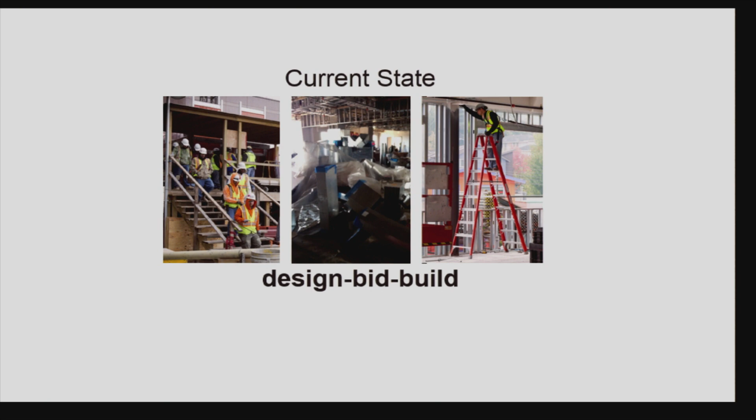So I'm going to go to the current state. This is the current state, you know. And what we have to do is replace the current state with a framework that embraces manufacturing productivity in a fundamentally different way.

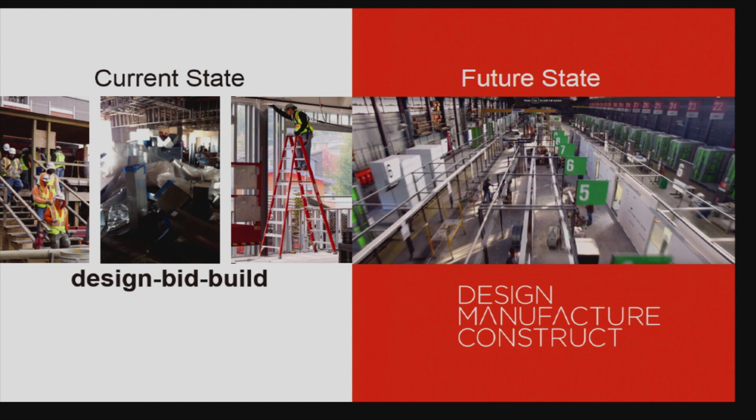So what we'll call it is design, manufacture, construct. Because if there's nothing that I am, it's creative. And if you put manufacture between design and construction, you can take the existing supply chain, like yeast in winemaking—we can take grape juice and turn it into a wholly different chemical reaction, which is design, manufacture, construct.

What we say is we will teach a legion of designers how to leverage manufacturing productivity so that we can make construction simpler. And if we can do that, we should be able to deliver far higher quality at a far faster clip at a far reduced price. And if we can do that, we should be relevant.

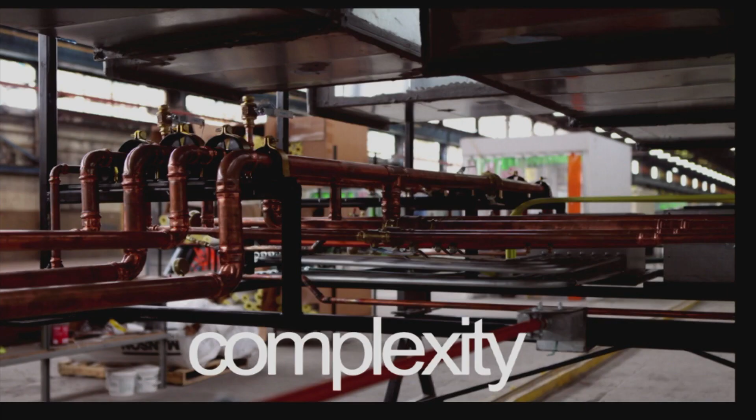So we call it design, manufacture, construct version 1, and it starts with three basic tenets. We are going to find the appropriate complexity. Complexity in this case—these lights are brutal—we're going to find the appropriate complexity.

What this means is we're trying to remove complexity from the job site. But in order to do that, we actually have to increase complexity on the technology side, on the engineering side, on the transportation and logistics side, significantly greater than the complexity we're removing from the job site. But at that place, we can begin to control it in a different way.

The next thing is we're going to do things that allow us, in a dwindling skilled labor market, to create reproducible quality. Many of these things are about bringing in digitally controlled operations, but some of these are taking old school trades and rethinking how they're processed.

The third one is we're going to do this in such a way that there's a payoff. We've heard it no less than three times today: speed to market is a crucial component, whether you are a for-profit or a not-for-profit. The way you are going to get your investment back is that you are going to demand that speed is not a theory, but a reality—not on one project, but on all projects. And if you can do that, you'll begin to move the needle.

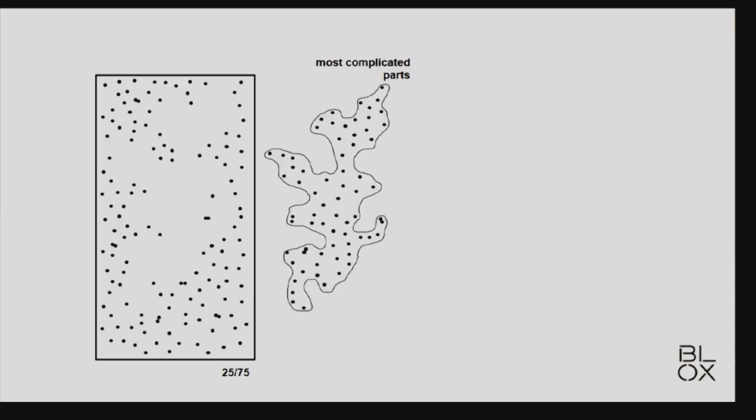On the right, the most complicated parts are going to be organized in a lean factory. They're going to take 800 parts and 13 trades, and they're going to make any number of pieces by the hour. And these are going to be high-quality pieces that can be made in the thousands per year and reinserted with a gravitational changing density that affects the orbits of the trades around it.

Because you can't take a 20 by 20 by 10 foot box and bring it into a job site—and 100 of them—and expect everyone to act the same around it. So it begins to force a change in that behavior.

So this is a case study. We work with a number of clients. HCA has been an unbelievable pioneer with us in this spot. I am careful not to release anything that is proprietary, but these have all been genericized so that we can talk about it. They went on an effort to do design, manufacture, construct version 1 about 5 years ago.

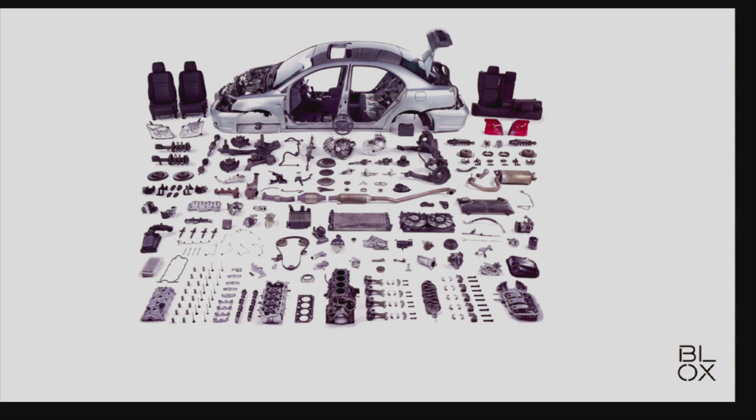So the first thing we did was remove unnecessary variation, and we completely embrace necessary variation. The second thing we do is once that variation is removed, we can standardize parts.

Standardized parts means a little bit different to some people than to others. But what we mean by standardized parts is there's a basic chassis which can be used in a number of different conditions.

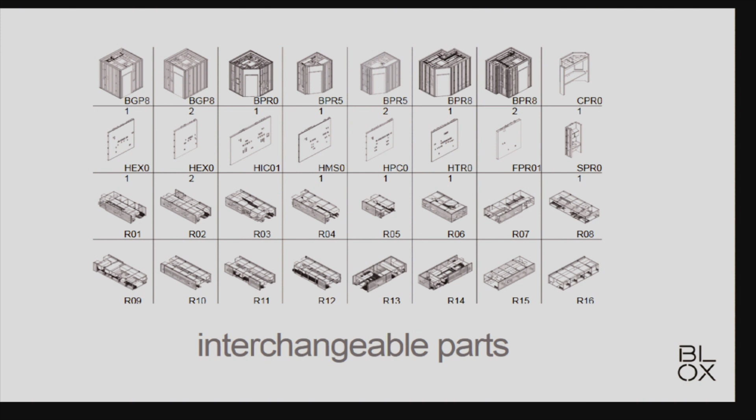And once you have a standardized series of parts, you can create interchangeable parts so that a regulatory approach can go from Texas through IBC and FGI to AHCA in Florida to OSHPD in California. The notion of a universal common denominator makes the parts interchangeable so that if you have a big program, you are not thinking at the project level, but rather the program level.

And these parts exist a priori to the commencement of any project that's going on. There's an expectation culturally that the architects and engineers will begin with these components. But they're not static - they iterate.

The first ones we did were like the old Corolla of my birth year in '65. It had 4 wheels and a combustion engine, and that's it - I don't think it had seats or seat belts. It evolved to having seat belts and perhaps a catalytic converter, and it evolves further to where it's remarkably improved, but still a combustion engine.

All the while, we're working on a set of quantum leap pieces underneath it that move over to become the Tesla - the ones that don't operate with a combustion engine, and don't have a supply chain reliant on petro stations. So this notion that the standards are dynamic is really important.

So what did all that mean? In the beginning we did a half a dozen projects, with an objective of casting a wide net - many architects, many contractors. The second part of it in '15 was, can we scale it? Can we take that to market at a larger place? The third one is where it has now moved virally, and we're working with their team on literally every project - it's assessed on whether it has the pieces or not, and most do.

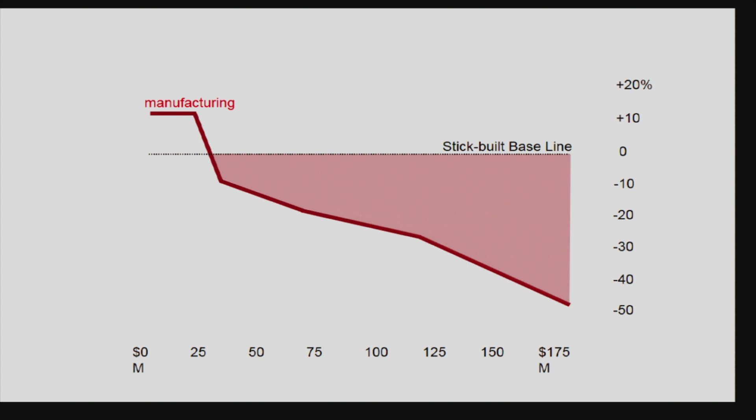And so that was pretty happy, but there was a bad part of the story. Guess what?

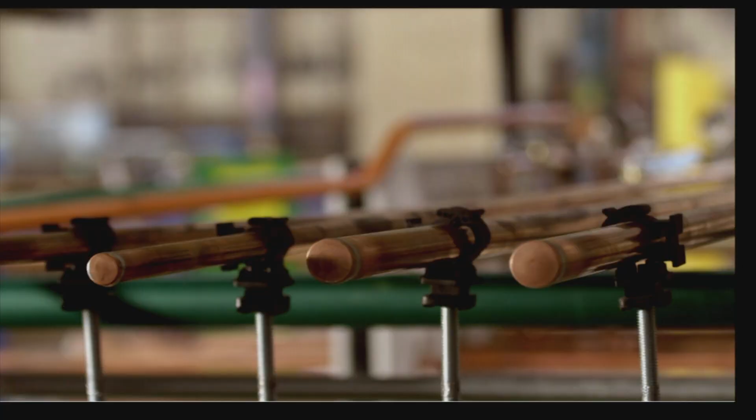The total cost continued to escalate even if the curve flattened a little bit. So we were meeting some significant goals, but not all of them. We wanted to lower overall costs. And this is a 2-minute video, I'll talk over it, of what DMC version 1 looks like at some scale.

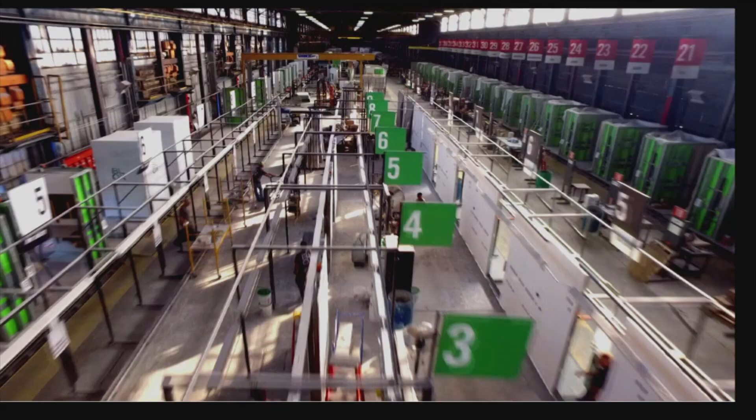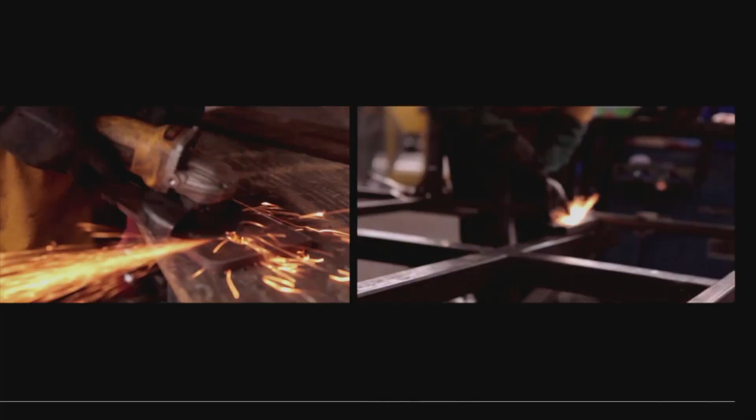This is the old Pullman plant in Birmingham, Alabama. It's sandwiched between Hyundai's North American headquarters, Mercedes, and Honda. We're in an industrial hotbed. We're using a mix of digitally controlled methodologies and manual trade craft that are able to be distilled to a point that we can teach others how to use them.

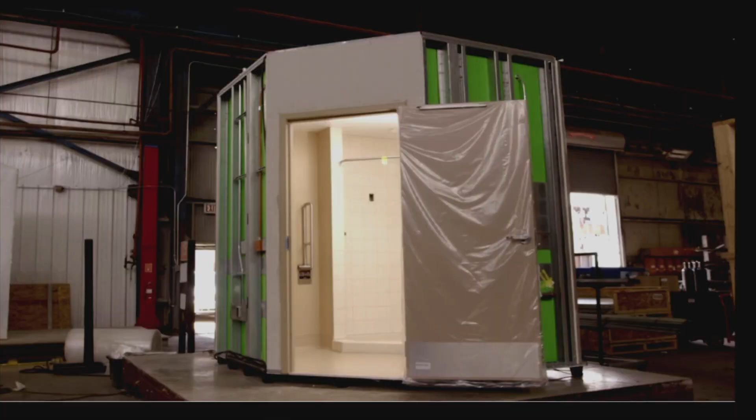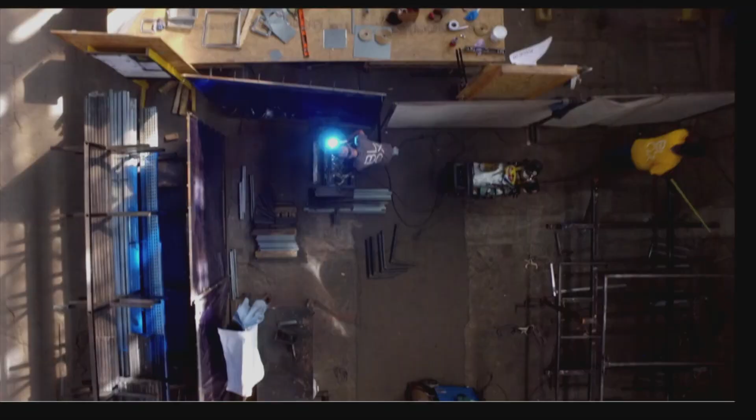We make parts in this spot of fairly low acuity - a head wall, a bathroom, an exam room, various pieces. We have a legion of architects and engineers that work on the other side of a tin wall that are managing this on a daily basis, and then there's a feedback loop between all the ongoing 50 or so projects that are happening with one client to deal with these pieces.

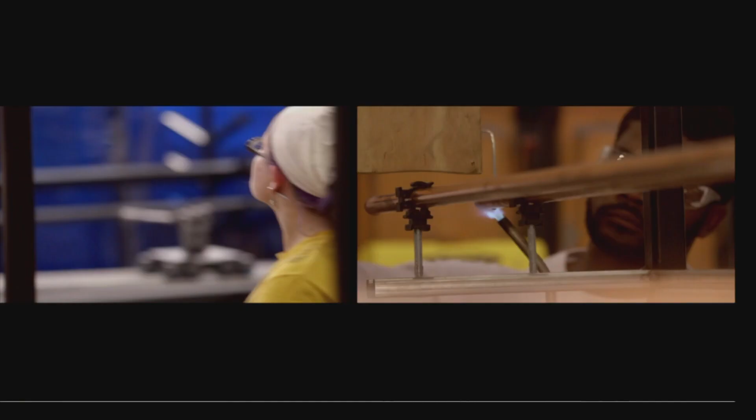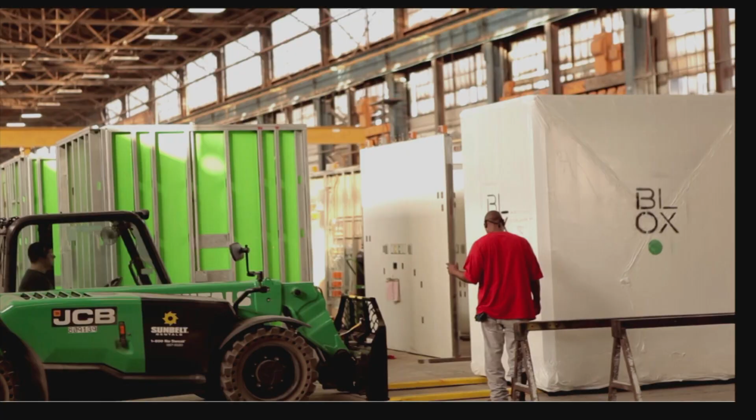Each year we add more complexity. We added MEP racks, and not an MEP rack with a unistrut that is interpreted, but a standardized part that's more like a car frame that can take standard components and be digitally controlled to insert and know that they go together within a really tight margin. We had to develop the methodologies at scale to figure out how to load and pack and ship and get these pieces in there, and it works.

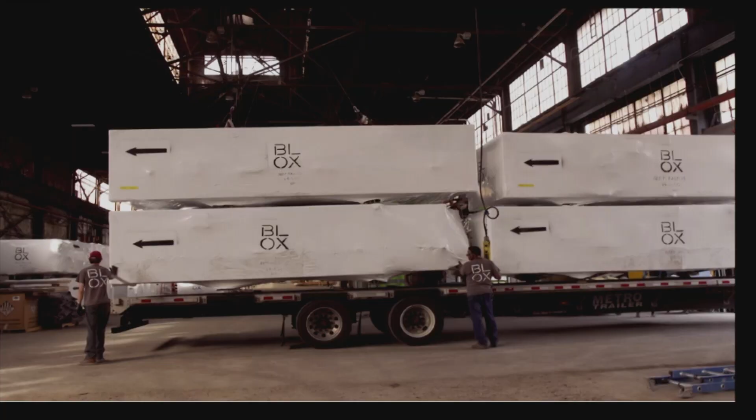These are MEP racks. There are 32 tons of product that's in that. Those 32 tons, we realized that when there was a rounding error, it usually favored the site construction. But when we began to take more and more out of it, and we could quantify every piece that we did, there was a spot where, wait a minute, something's not adding up. Something just doesn't make sense.

And so when we decided to remove all of the pieces, we could really begin to find out what the ultimate cost of those pieces should be. So at the end, you'll see that the surgery and the exam room and all the pieces function as an integrated whole that does not feel in any way compromised by its standardization.

And that is V1, and it is a baby step. This is not innovation. This is what everyone should be doing in the 21st century. It's really incontrovertible. Hard to get there. There's not necessarily a supply chain that's mature enough to be able to deliver it to all of your markets. But in my opinion, it is obvious. It's been proven by others, and it is not easy, but it is worth the effort.

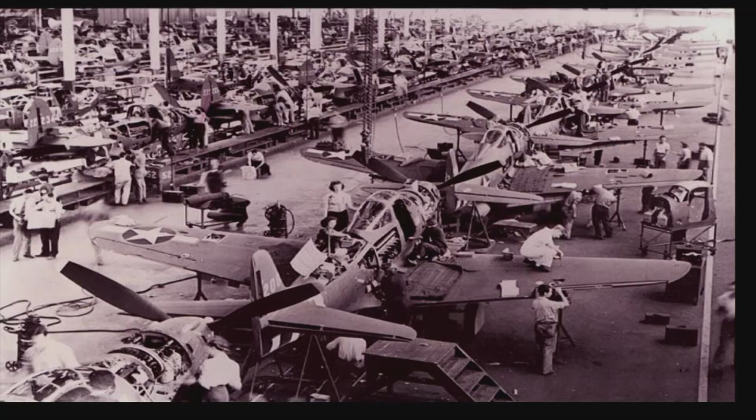But that's not where we want to end on an innovation. We want to talk about where it's going. And where it's going is compared in this photograph to the way they made the P-39 Airacobra in World War II, which is a moving assembly line very similar to the one that we have, and it makes airplanes. And the 747 in Seattle uses the same methodology.

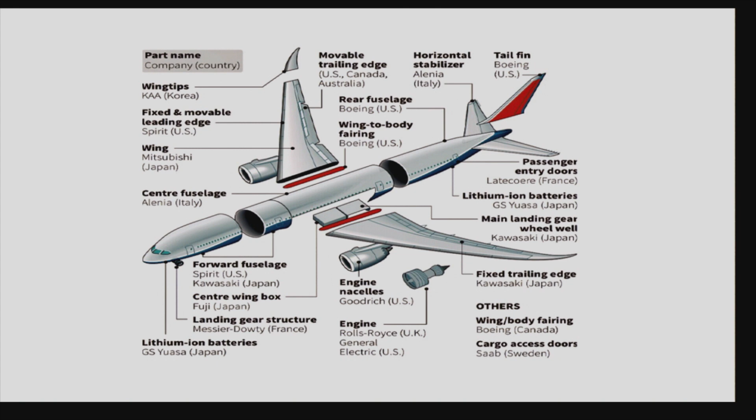But Airbus came on the scene in the 90s and began to shake it up. They brought a little competition to Boeing, and Boeing had to get their act together. And so they left the notion of a 747 into this 787 delivery, which is called chunking, which is taking an airplane, designing it holistically, moving performance components to the best-in-class manufacturers that make the pieces for the tail fin in Italy, or for the engine in England, or for the fuselage in Seattle.

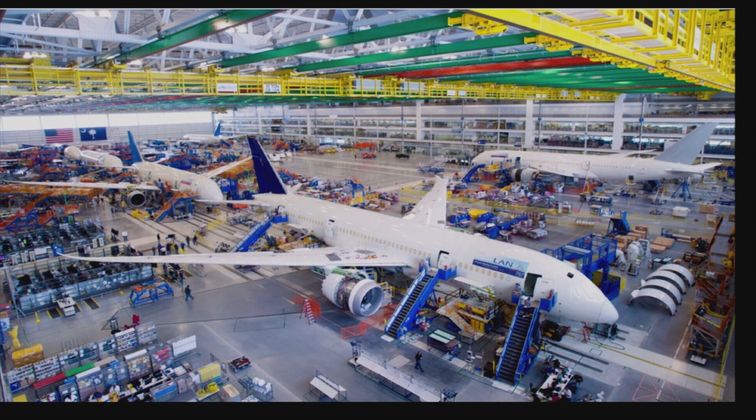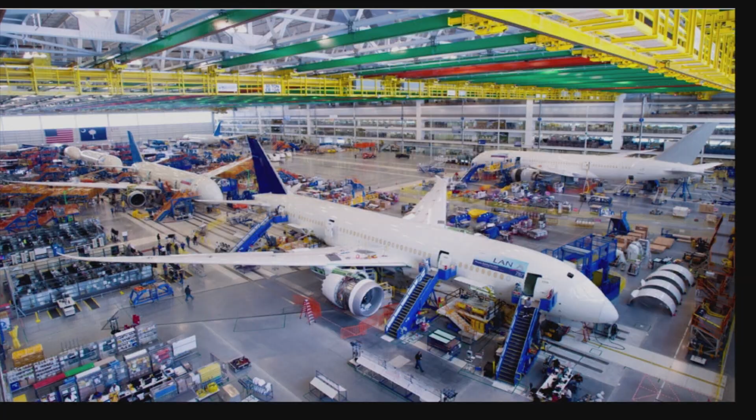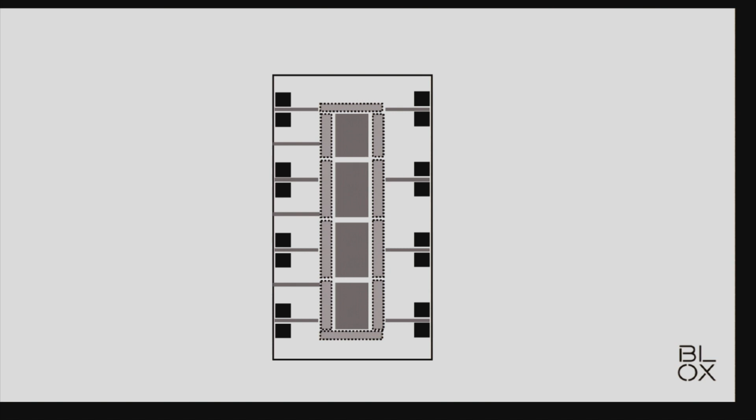And begin to build the airplane in a fundamentally different way in Charleston, where it's an assembly of a building rather than a stick-built version. And this is not a modular building. This is an approach to build a hospital, or could be a model for an approach to build a hospital in a different way. So V2 takes the same building, the same dots of man and method and material. It lassos not one critical mass, but all of them, and it extracts them all to places around the country, or around the world in this case, who can organize and drive additional performance in each one of those parts, so that we can come back and make an integrated patient floor or a hospital or vertical expansion really rapidly.

So this is nice because this allows you to have less disruption at an occupied facility, or to get one out of a greenfield faster. So I'm going to show you how we're modeling this right now with the freestanding emergency department. This is for another client. But it takes a few steps, a few bites at the apple to get there.

We named this Mr. Potato Head because we're just a serious bunch. And that potato head is important.

It's a chassis. What we found is that in standardization, there needs to be variation in order to make it work. The Mr. Potato Head model seemed to answer that, because in some markets we just wanted the potato body, other times we needed the feet, and some markets needed googly eyes and all of the above.

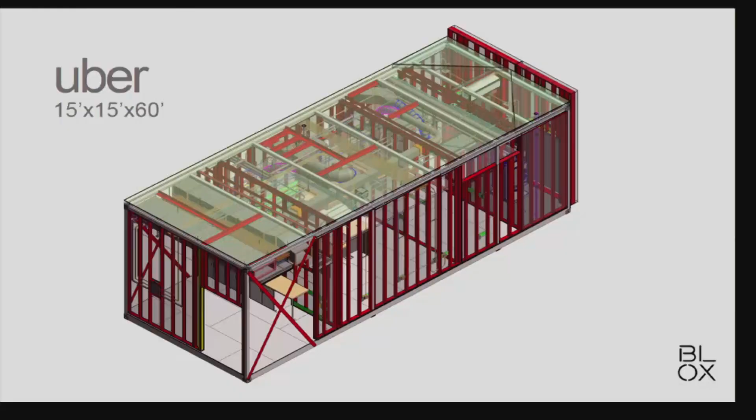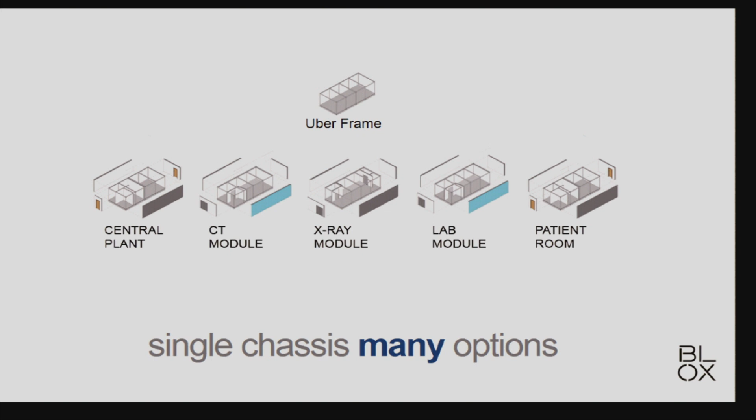When we put all of those together, we could create standard parts that produce a near infinite variety of market pieces. It starts with the airplane chunk, an Uber module, which is a large chunk, 15 by 15 by 60 feet. It can be deployed into a central energy plant, a CT module, an X-ray, a lab module, a patient room, really anything. In this case, we're applying it to a small freestanding emergency department, which is about speed to delivery, and it's an acute facility.

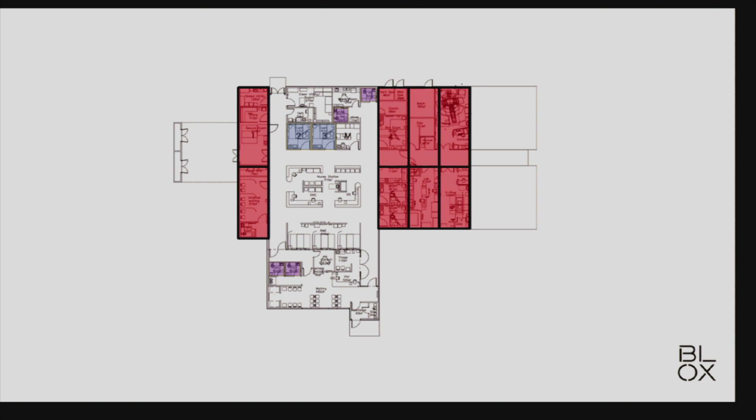So these modules work with a set of components that can then be applied as though they were modules in an existing structure. The exterior skin can be placed around it in real time. You have a slab, you have the Uber modules that go in it, you have a structural frame.

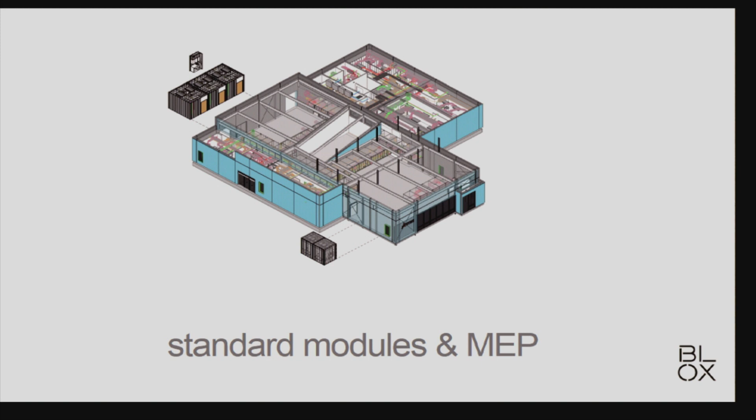I look at my buddy over here at ConXtech that makes a perfect fit for these pieces. A roof goes on, the exterior walls, the standard modules come in. This, by the way, is happening really fast. The appurtenances go on, there's the googly eyes.

The exploded axon is interesting. Everything above the foundation, there's a little spit of small line work — that's the site-built connective tissue. Everything else is a kitted part, either flat-packed and shipped across the country, or a volumetric piece if there's enough complexity in it to make it make sense.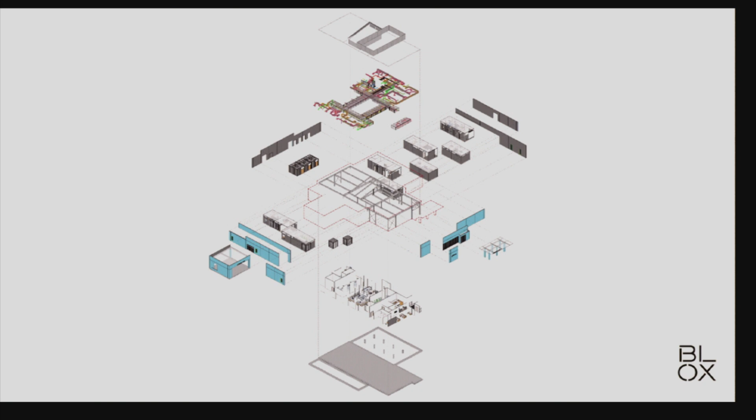This is it going up. You're looking at week 1. You'll see in about 6 weeks a completed, dried-in, central plant and air-conditioned building happening right now. By the next 6 weeks it starts slowing down a little, because that's mostly the tie-in, and we're not that good at it yet.

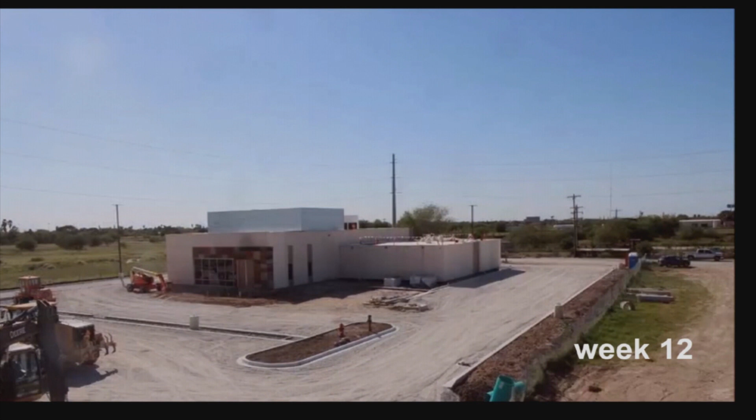At the end of it, we're able to complete a freestanding ED in nominally 12 weeks. It typically would have taken 10 to 12 months to produce that. I've talked to some people today, and that's about what they see in their markets. That's certainly not solving the acute care issues, but it begins to address the speed with which it can happen.

So the first cost coming out of the chute, after 10 years of work, is that we can deliver a product that we know we're going to reproduce in some form nominally 10 times. We can come at 20%, and that cost is expected to drop. When we deal with the speed, it's phenomenal.

Last few slides to show the flexibility of this. So this is a kit of parts. It exists on our Weaver — you'll hear us talk about the platform. There's a significant amount of digitalization that has to happen here.

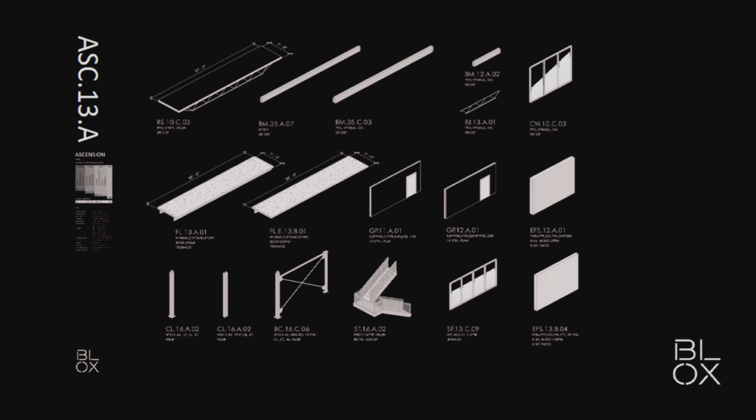So we're building digital tools. Part of our workforce is a team of computer programmers who do nothing but either invent whole-cloth software that ties these pieces together — hence its name Weaver — or work with other software developers to integrate those pieces into what we're doing. But you start with a kit of parts.

That kit of parts can be deployed into a structural frame that's 1 story, 2 story, 3 stories. Each one of the connections are standard details. There's only 3 member sizes in this whole building.

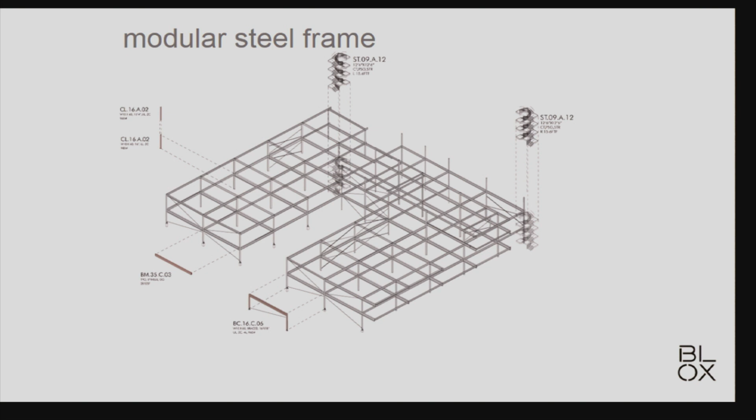The red is the customized pieces. We do the same thing with the exterior skin, the glazing, etc. We do it with the MEP racks. We do it with the planning modules, which are diagnostic and treatment.

And all of those come together on the job site, where we acted, in this particular case, as the design architect of record and as the manufacturer, but not the general contractor, to create an overall piece, which is a world-class medical facility that is operationally cogent and site-specific.

And so as I have moved away from architecture, I find myself coming full circle back to it. I love this stuff, and I love our profession, and I love construction. I just think that there is an awful lot that we can do better. Thank you very much.